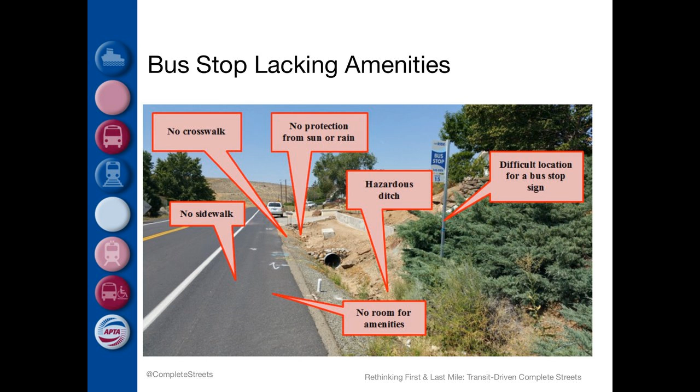Unfortunately this is not unusual. This is maybe more typical than it should be in many of our streetscapes.

The Regional Transportation Commission in Reno, Nevada, which is both the MPO and the transit operator, has put out a bus stop toolbox. There are several factors that determine placement of bus stops: operations and maintenance factors, passenger preference, accessibility, property owners, ordinances and regulations, and of course, politics.

In this photo you can see the type of infrastructure that agencies incorporate in their projects to make accessing transit easier. The RTC of Washoe County has implemented a regional Complete Streets initiative that helps guide their transit projects, and because of this policy, RTC developed a bus stop toolbox that they recommend to transit agencies.

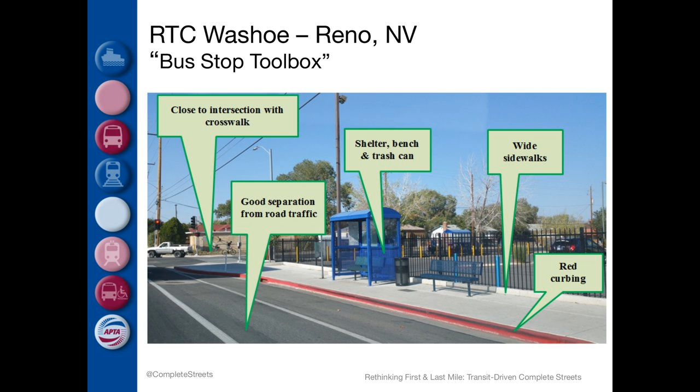We recommend working with your MPO to create a complete street plan, a bike and pedestrian plan, an ADA (Americans with Disabilities Act) transition plan, and working with developers and all stakeholders.

Capital Metro is the transit agency in Austin, Texas, and they are partnering with the City of Austin to collect field data relating to the accessibility of pedestrian pathways in Austin. They use GIS software loaded on tablets to collect data on sidewalks, driveways, curb ramps, and crosswalks.

Pathways are then graded using the following classifications: compliant and functional, meaning the pathway meets all ADA requirements; non-compliant and functional, meaning the pathway has some minor issues but may not be accessible to all passengers; and non-compliant and non-functional, meaning the pathway has major issues and is not accessible.

Based on the data collected, Capital Metro and the City of Austin will continue to partner to make repairs and improve accessibility. In the future, Capital Metro plans to use crowdsourced reporting of accessibility issues through a trip app.

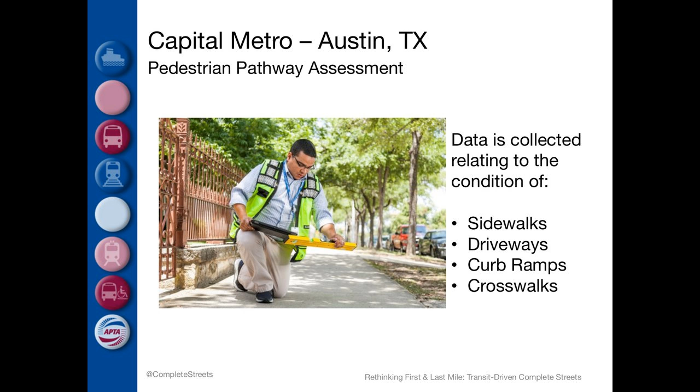Another example of complete streets as the underlying component for linking to transit is the San Diego Association of Governments, a forum for regional decision-making comprised of 18 cities and county governments. They've developed Safe Routes to Transit, a term used to describe street and sidewalk improvements that make it safer and more comfortable for people to walk or bike to and from transit stops and stations, as well as home, work, and retail destinations.

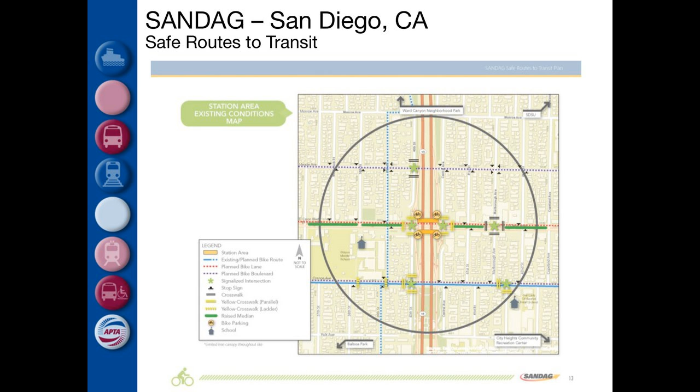Safe Routes to Transit access improvements are designed to enhance access to transit but benefit everyone who walks or bikes in areas up to a mile away from transit stations. SANDAG developed a framework for understanding potential Safe Routes to Transit needs, project types, and costs throughout the San Diego region. Safe Routes to Transit is now required for every new transit project, so it's a good program to emulate.

Then I want to talk about, real briefly, Washington, D.C.

Washington Metro has the Metro Rail Station Area Investment Study, which proposed bicycle and pedestrian projects in all station areas. WMATA compiled an inventory of unmet bike and pedestrian access needs at all of its 91 metro stations.

They score these projects using 12 measures, including safety, ridership, equity, and path to service, among other things. Based on the top scoring projects, they receive priority for funding and implementation. What they've really found is that complete streets is the connective tissue that links transit, access, and connectivity.

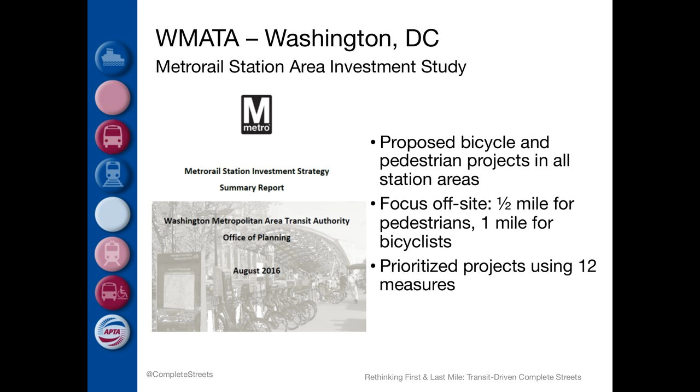I'm going to close on two other things that APTA's been doing. APTA has an urban design working group that has developed a few recommended practices for transit agencies that touch on complete streets and transit agencies.

One in particular is defining transit catchment area, which provides information for assuring quality access to transit. The diagram on the left illustrates the transit catchment area, or potential transit riders within a given area around transit. Having good connections for both pedestrians and cyclists increases the transit catchment areas and potential ridership.

Being successful at implementing complete streets around transit requires effective partnerships of many stakeholders. The Transit Agency Partnerships to Improve Urban Design and Enhance Service Effectiveness document provides valuable recommended practices for successful partnerships.

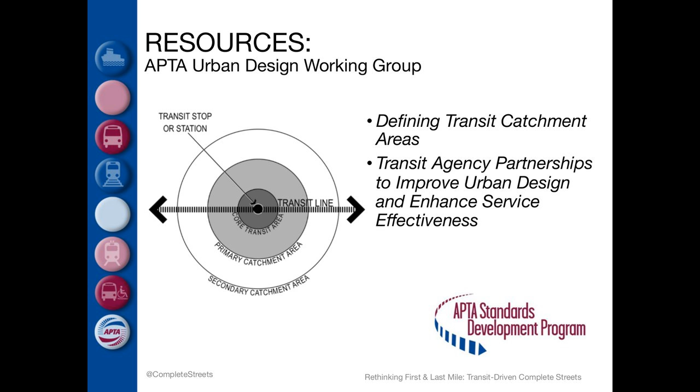Finally, I'm going to close on one of the products that's really been popular. APTA has a recommended practice on design of on-street station stops and access from surrounding areas. Transit agencies use this document to look at existing or new on-street stops and to provide input to local jurisdictions and developers to invest in pedestrian improvements.

Local jurisdictions and the general public use this document to facilitate discussions about planning, design, and investment decisions made by public agencies and elected officials. Developers, planners, and architects also use this document in making design decisions regarding the interface of private development and the public realm where transit is present or planned.

Now, this was just the tip of the iceberg for transit involved with complete streets. We haven't even done a deeper dive into transit along the corridor with BRT corridors and bikes. I just see a whole lot of other webinars coming out with transit and complete streets in this series. So I just wanted to end there, and I think we'll hold questions till later. With that, I'll turn it back to you, Emiko.

Thanks so much, that was excellent, Rich. I love having you set the foundation for why this is so important. I was just in San Diego earlier this week, and for those of you that don't know, San Diego is actually one of the more dangerous places to walk in the state of California. I was on a site visit where we looked at many communities where people are transit dependent, and yet it's very difficult for people to safely access transit. When we were there, we actually saw a crash between a car and a pedestrian, someone trying to access a transit stop.

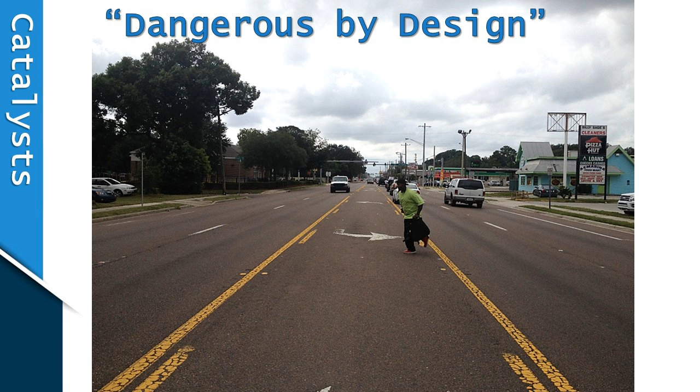This is a person trying to rush to get to the stop. As you know, human behavior, people aren't going to necessarily walk that extra 500 yards down to the signalized intersection, they're going to mind the gap and try to cross there. So there's a lot of basic things we need, like mid-block crossings. We need bicycle infrastructure too, because people having to walk further to those stops end up riding their bike instead, and basic infrastructure for them is lacking.

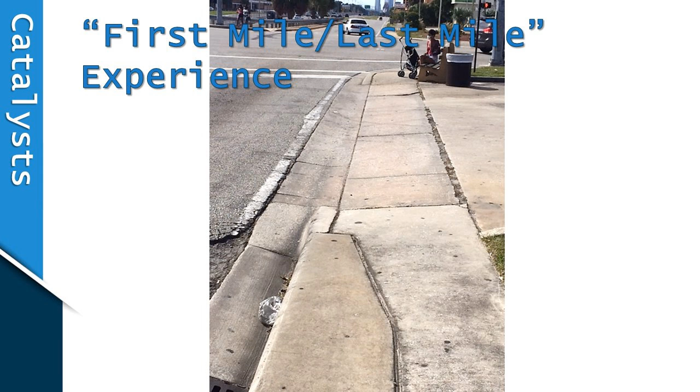So with that, once JTA redid the network and the system redesign, it became apparent that the infrastructure had to be improved. Part of this, a couple years ago, they were able to extend their local option gas tax. And I mentioned that JTA has this road building component.

Within this, they developed a program called Mobility Corridors. These blue lines are kind of, think about that as your sandbox. That's our high-frequency, newly designed high-frequency transit network. And these are the places where we really need to focus in on those countermeasures and interventions about how to really improve the conditions for folks here.

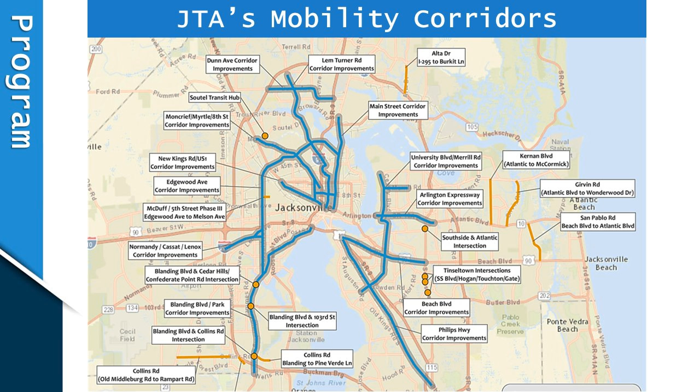This was a $15 million program, so really it was a seed. This is probably 70 miles of network. So we recognized that we have to really get some baby steps, get some demonstration projects underway to build this program. We know Florida, nationwide, there's been this huge, tremendous

movement on complete streets, not only from the coalition advocating it, you have NACTO, you have movements towards Vision Zero, so all of the headwinds are pointing like we have to think differently, number one.

So there's a lot of resources that we're building, and the State Department of Transportation is currently in its implementation plan and rolling out new standards, which will be very important, so that you really have a clear line of communication between, okay, when we want to do something that's on a state road, whether it be a lane elimination project or whatever, DOT and the local jurisdictions are speaking the same language.

As I mentioned, DOT's Complete Street Implementation Plan, I would encourage folks to go to their website and look at what they're doing. It's really an important part of this process because a lot of the roadways, as I showed you in the previous slide, are state roads, and we have to work with the state to do those

improvements. So we have this Mobility Corridors program. I mentioned this idea you have limited funds. You certainly don't want to swallow the elephant, and that'll be one of the big takeaways as I leave you this presentation. But we began the process with just some pre-screening, and really this is just a simple analytical exercise.

You may have heard of the term the 5 Ds, but to go in here, we did a GIS analysis that showed where are the places that people would walk, where are we seeing the high concentrations of transit ridership, where is the design that would at least support some modicum of walkability, and we transformed that into this.

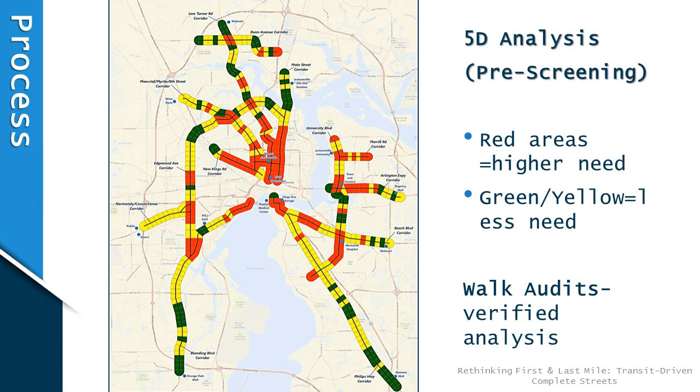I think that's a good lesson for any community undertaking this Complete Streets initiative, to start small, get the wins, get the champions behind you, and that way you'll feel better moving forward and you'll have greater buy-in.

When we started the process, this was August of 2015, we began the mobility corridor work, going out into the community in each of these corridors. This was spent riding the bus, talking to folks, walking, engaging, really trying to tell the story about what's going on here.

When you take the bus, and I'm sure this is similar in a lot of the Sun Belt, it's just a different experience for people that really have to take transit. A lot of people have to get up an hour earlier and walk a long distance to get to the stop, then deal with numerous stops. Sometimes a trip that by car might take 15, 20 minutes may take an hour and a half, 2 hours by bus. So it's very important to recognize that Complete Streets, to me, is a customer service experience.

It doesn't just begin when you get on the bus. It begins when you put your foot out on the sidewalk, if there is one, and you're walking to the stop. I think that's why this is so important.

So we engaged with folks and asked, what's the story of the community? There are so many things you could do, but we had to avoid swallowing the elephant and have some meaningful projects to move forward. So we categorized everything into a set of projects we call the Keystone projects.

Those are the big projects at the intersection that you want to do tomorrow. There's also a set of operational and safety items, like hey, we just need to stripe that crosswalk, make sure the pedestrian actuated signal works. That's so important, and you could go out there and do that tomorrow.

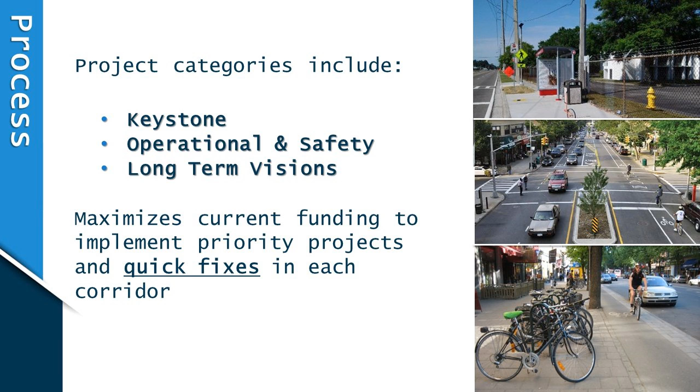When you're dealing with elected officials and limited funds, but a lot of projects, it's important to have a strategy for prioritization, and to have a defensible set of criteria that says, this is where we want to start and why we're going to start here.

So we built a matrix for each of these corridors to figure out where you should start. We built everything around a set of criteria: mobility and safety being one, planning and funding leverageability - by the way, when there's a resurfacing project, that's one of the best opportunities to do these projects - and also public health and livability, economic development, and competitiveness.

So you have a scenario where a 4-lane undivided arterial roadway has 8,000 trips a day on it, and we're seeing the highest incidences of pedestrian accidents and fatalities along these roads. So we looked at the ADTs, comparing that to the typical capacity of perhaps a 2-lane roadway, and overlaid that with the crash data, and realized we have overbuilt facilities.

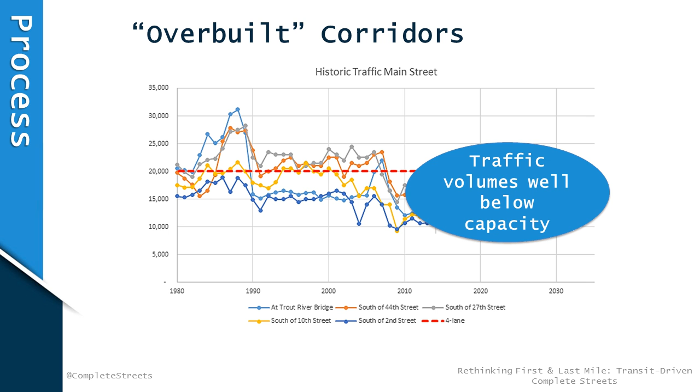Some of the concepts I'm going to talk about next, not only were we looking at the granular scale of somebody trying to get to the stop and what they need, but also placemaking, livability, and economic development, and how we can do redevelopment through these projects.

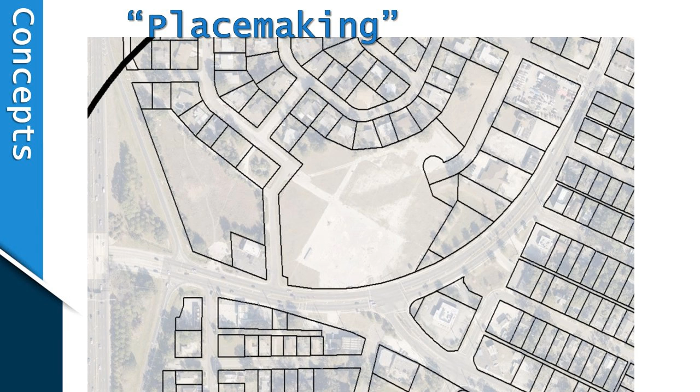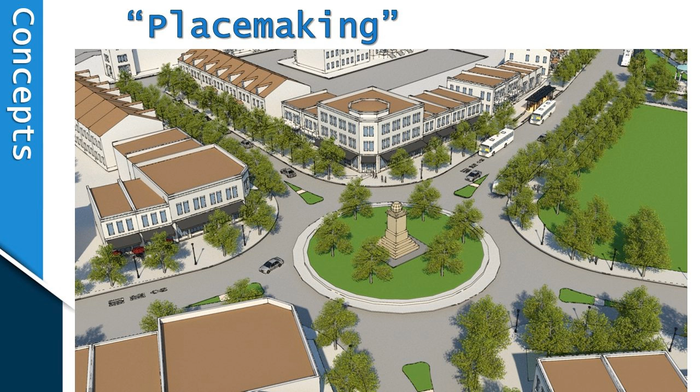So everything we looked at in these corridors—this was a BRT corridor for the First Coast Flyer that I showed earlier. If we were to repurpose some of these blocks and make them a little bit walkable, this is kind of what you can get ultimately. Over time it may take 20, 30, 40 years, but having this as your framework moving in was very important, and this helps the community really get behind you.

So these conversations all end up indirectly supporting access to the transit system when you get the walkability equation right. Ironically, sometimes you build these medians and they're beautiful, but they're beautiful for the vehicles driving fast, passing through your neighborhood. So again, it's that whole discussion of: do you want people to come to this district, or do you want them to go through it? People really recognize that we want people to go here slowly, to make a nice multimodal corridor and support the businesses in this area as well.

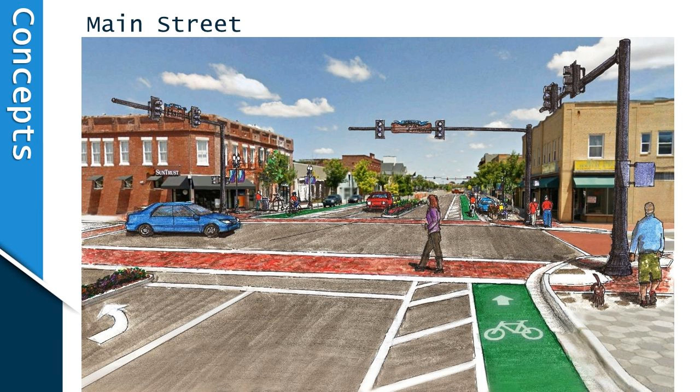So that's one of the concepts we have. One of the things we're looking at now is converting this to maybe a protected cycle track. Also, as I mentioned earlier, JTA has a monorail system, and there's discussion of maybe having an autonomous vehicle run down there. So that's one of the other suggestions.

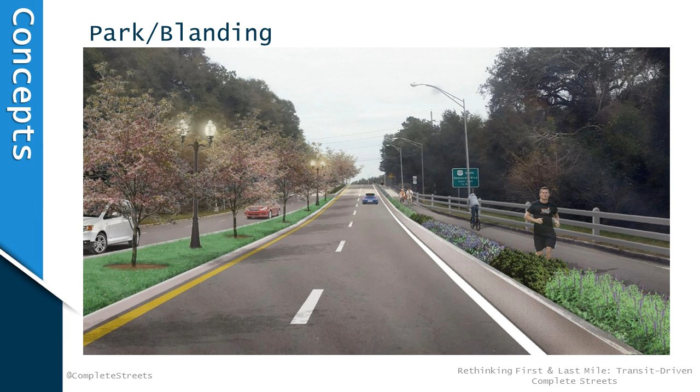One of these earlier photos I showed you earlier—this is an overpass. People do ride their bikes here. This is kind of the condition. What if we did this, to sort of repurpose the space? The good thing is the traffic volume suggests that you can do this. It's just, again, building the will.

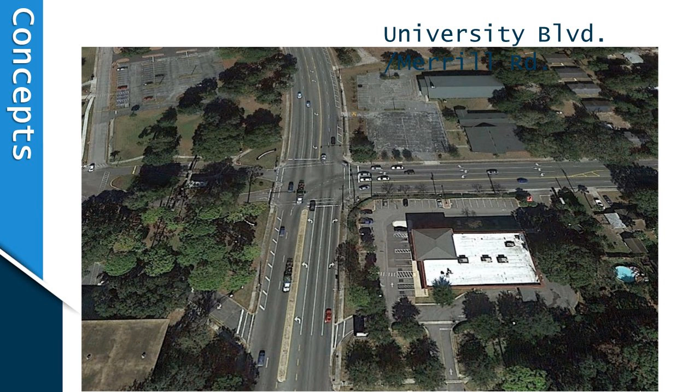This is one of our last Keystone projects, at the corner of University Boulevard and Merrill, east of downtown across the St. Johns River. What if we did this? So really, when you have the placemaking story combined with access to transit, you really start to build the champions, and that's what's really important.

I want to wrap up here, leaving time for questions, with some takeaways. When we started this, it was interesting defining the program. Initially, I think it was the sense that we just need to redo the shelters—maybe put in a sidewalk connection, maybe a bike lane, kind of small. We really weren't even using the term complete streets. It was just, we're going to redo the network and we have to have our shelters and stops upgraded.

Once we step back and really start to see the experience of people as they try to access the system, it becomes clear we should have a complete street program. Defining that was a little bit early on, really being strategic, beginning with the end in mind. Ultimately, what is it that you want to have happen 5 years after this project? That became the calling card.

Going to people and telling them about how do we get ourselves off of this list, those messages, simple messages to elected officials. We're the third or fourth worst metropolitan area for pedestrian deaths. Is that reason enough? These kinds of things, and why we should think a little bit differently.